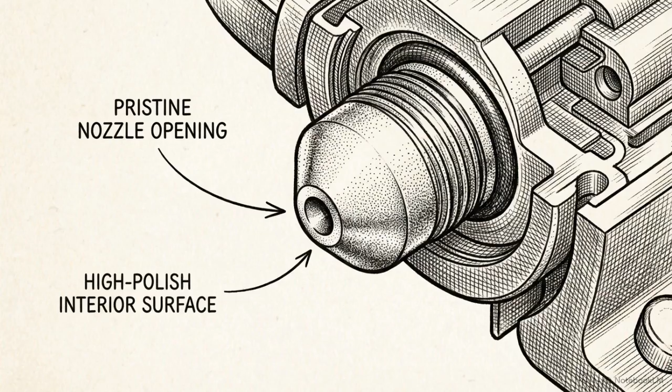Technicians typically focus on the visible mess. They use solvents to clear clogged nozzles and wipe away the leaks at the head. Cleaning a nozzle removes the blockage, but the pressure that forced the ink out of alignment hasn't been corrected.

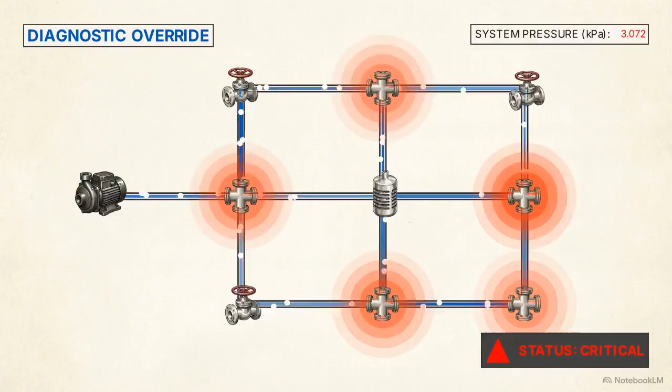The hardware is clean, but the system is still failing. Focusing on visible failures leaves the internal fluid mechanics unchanged. The machine is destined to fail again.

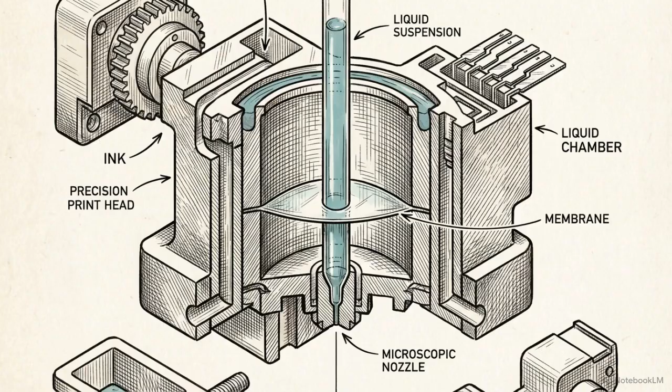Printers operate through a calibrated internal pressure equilibrium. This balance holds the ink in place until the exact millisecond of the print command. A faulty damper or a fractional temperature rise breaks that balance.

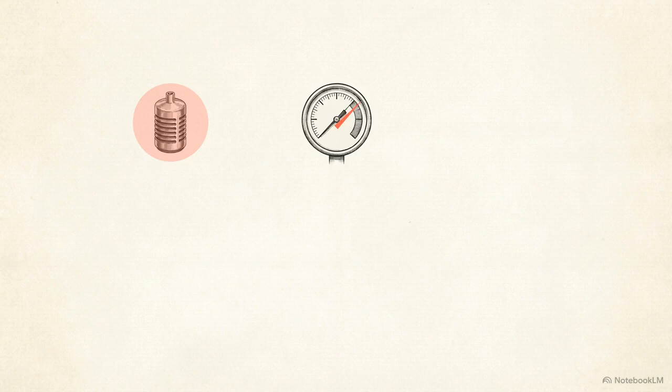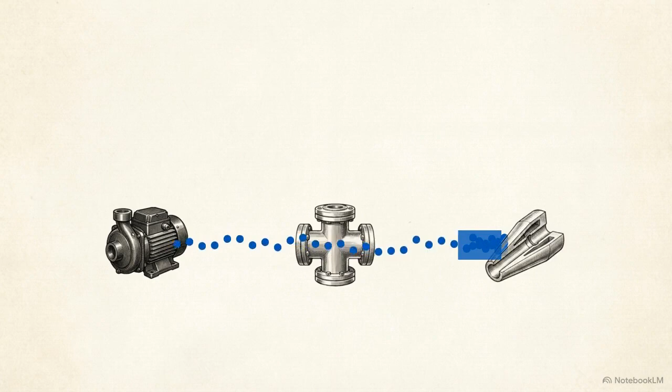With the fluid still pushing from behind, the pressure backfires. This force destroys the printhead and triggers a total shutdown. The ruined printhead is the final link in a mechanical chain.

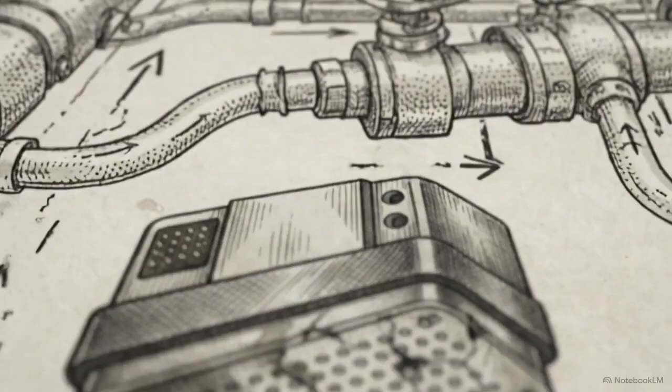The pressure system is the actual cause of the failure. Re-examine the standard repair process. Swapping a head only replaces the most recent victim of the pressure surge.

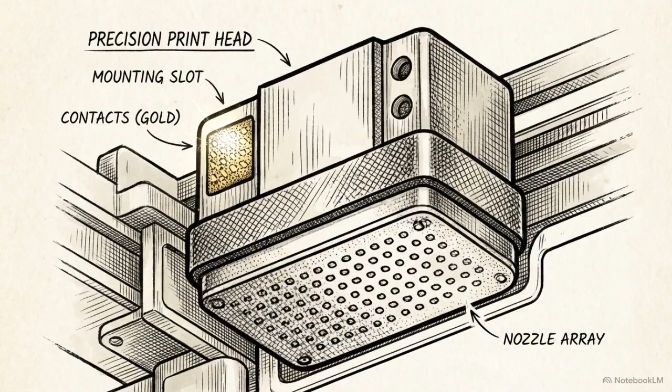Installing new hardware without resetting the pressure system is a temporary fix. The same imbalance will destroy the replacement component within days.

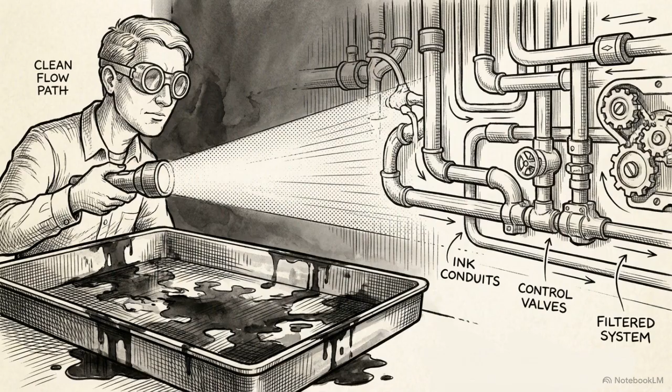Mastering these machines means looking past the visible ink. You must control the invisible pressure forces that dictate whether the hardware survives or fails.